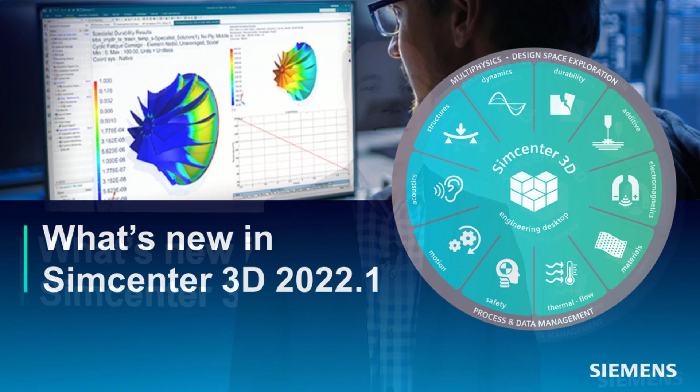It's been a year since I had the pleasure of talking to you all, and while 2021 was still a challenging year for many of us due to the ongoing pandemic, it was still also a productive year in terms of new development in simulation.

But before I get into some of these new developments, let's talk about the challenges that many of you face in simulation today. One of the major challenges with simulation today, in a general sense, is that it's too slow. Typically, CAE analysts spend up to 80% of their time just on modeling processes alone. And even more frustrating is that this entire process is often repeated for every single design iteration, since it can be difficult to reuse the previous analysis model.

The second challenge is that simulation in many organizations only takes place at the final validation stages of the development cycle. But to make simulation more effective, it must be used at all stages of development and by more than just simulation experts.

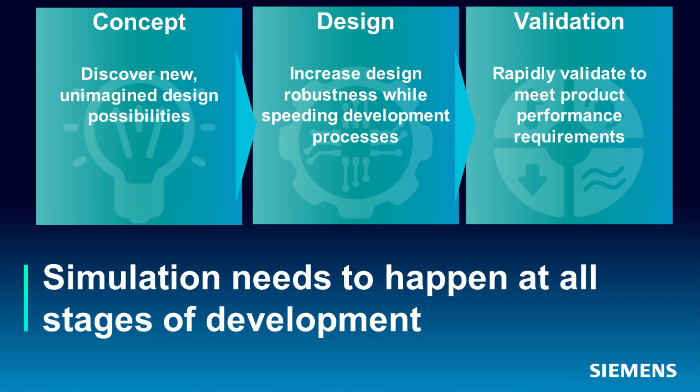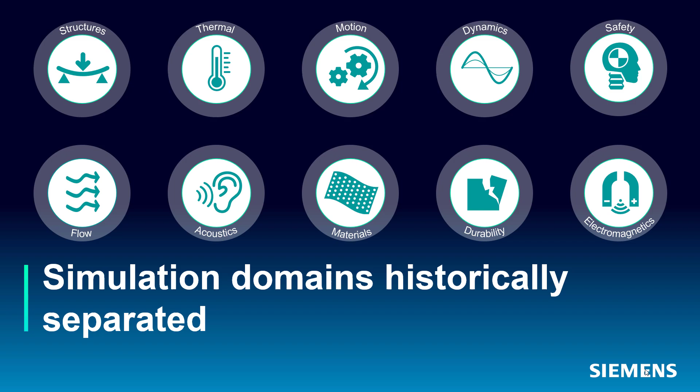Another obstacle today is that simulation engineers work in silos based off their functional domains, and each domain has historically required a specific set of software tools where user interfaces, processes, data files, and even vocabulary are all completely different. But physics don't happen in a vacuum, and in the real world, multiple physics are all happening simultaneously and have an impact on one another.

So how can you predict product performance if you cannot accurately predict multi-physics interactions? More collaboration and integration among analysts and software tools is required to better predict how your products will perform.

Simcenter 3D helps you conquer these challenges. As the most comprehensive, fully integrated CAE solution, you can work across simulation domains from a common engineering desktop. Simcenter 3D helps you go from CAD to CAE quickly while also keeping your simulation models in sync with the latest design.

And as I mentioned earlier, the Simcenter 3D development team has had an extremely productive year, and I would like to share with you what's new in this latest release, Simcenter 3D 2022.1.

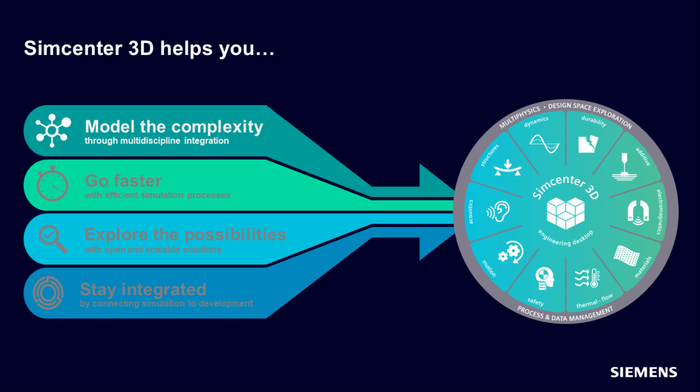New enhancements in Simcenter 3D help you improve simulation in 4 key ways. The first is model the complexity. Your products are complex, and you need to accurately simulate and predict performance by correctly capturing the right geometry, physics, and operating environment.

The next is go faster. Increasing complexity can slow down your organization's ability to make the right decisions and meet project timelines. Therefore, engineers need to find a way to go faster despite the complexity that they work with.

Explore the possibilities. Innovation requires exploration, which means you need to quickly explore performance for more design variants. This can be done by shifting simulation to the left into the design community, as well as automating and exploring more options for in-depth analyses.

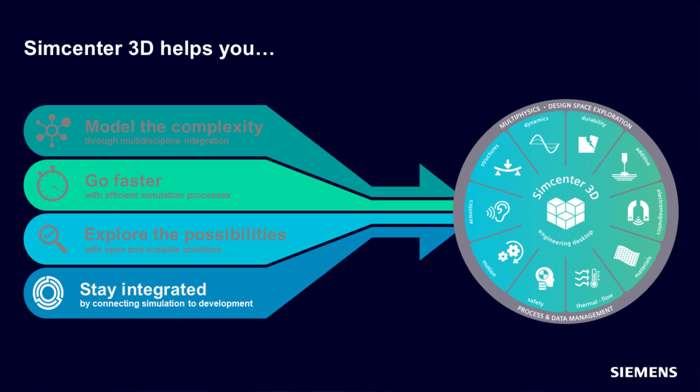And finally, stay integrated. With increasing complexity, there are more opportunities for misalignment between the different teams in development. Simcenter 3D connects you with the broader Simcenter portfolio to keep you more integrated with the broader development process.

So let's start with modeling the complexity. In this release, we have invested heavily in adding applications used extensively in the development of turbomachinery.

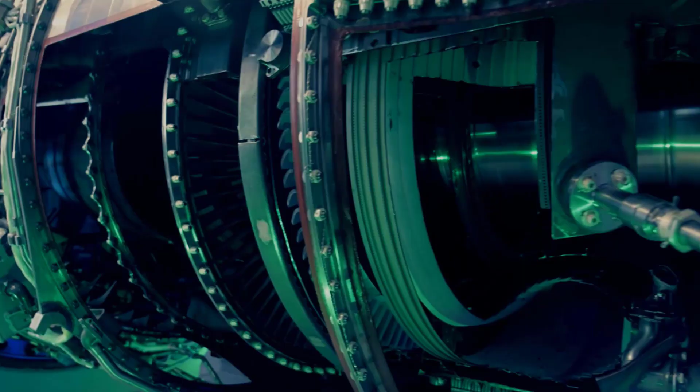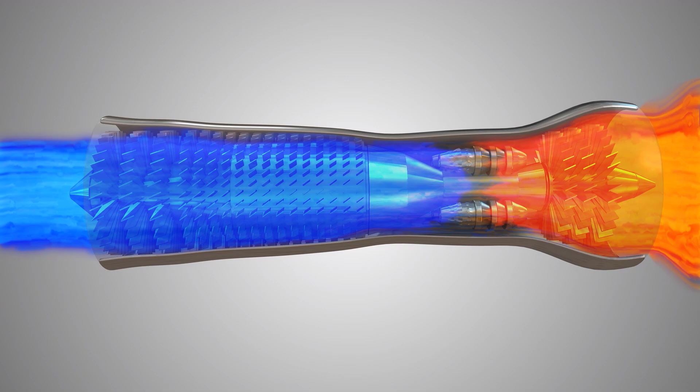Now, turbomachinery engineering is complex for a lot of obvious reasons. You have very complicated geometry throughout the cross-section, combined with many spinning bladed discs of different sizes, with fast fluid flow passing through the system, which undergoes extreme thermal changes. Fluid flow and heat also impact the structural integrity and dimensions of internal components, which adds yet another layer of complexity. And I haven't even yet mentioned the vibrations and dynamics that the system produces when operating at various speeds.

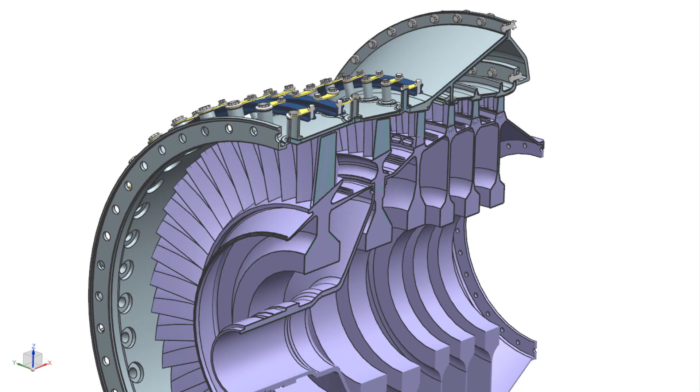So this is why SimCenter 3D has become a leading tool for turbomachinery analysts, since all of these analyses and more can be achieved through a single integrated platform.

So let's start with rotor dynamics. One of the main objectives of rotor dynamics is to properly identify the critical speeds of the system, which can then lead to very large vibrations and even system failure.

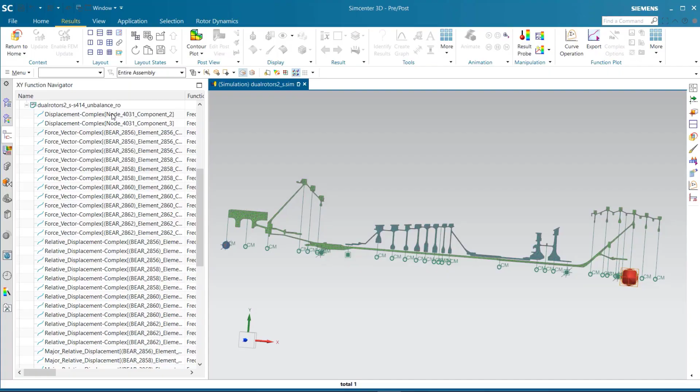SimCenter 3D offers a comprehensive rotordynamics solution with efficient modeling capabilities that help you quickly go from CAD geometry to simulation model. Using SimCenter 3D, you can predict critical operational speeds and survivability of rotating systems, while accounting for gyroscopic effects and centrifugal loads in a wide range of situations.

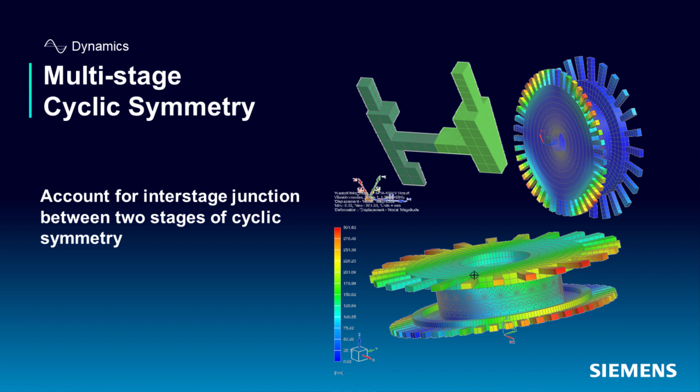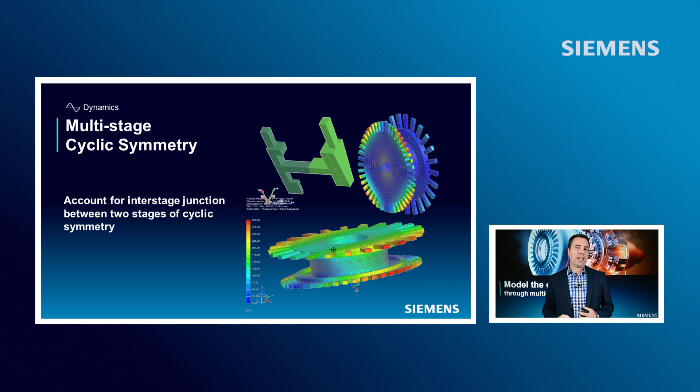A major highlight in this release for rotordynamics is the ability to account for the interstage junction between two stages of cyclic symmetry. When a rotating machine is made of different stages of cyclic symmetry, having potentially a different number of sectors in each stage, the interstage junction must be taken into account, like in this model with two stages of cyclic symmetry. This new capability couples different cyclic fields at the interstage junction by adding different fundamental, higher-order harmonics.

When looking at the results, we can post-process results for each harmonic on individual sectors, but we can also recombine the results on the full 3D model, taking into account the different harmonics together.

Understanding the thermomechanical performance of turbomachinery is another challenging feat. Prototyping is far too expensive, yet traditional disconnected CAE tools are limited in the physics that they can simulate. The real world integrates complex physical phenomena in one environment. Your gas turbine simulations should too.

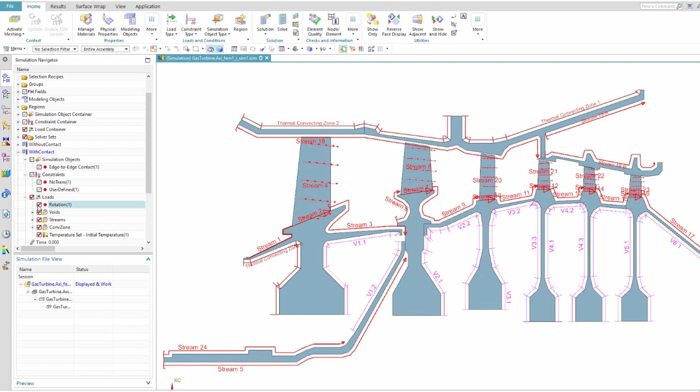SimCenter 3D integrates multiple physics disciplines within a single environment, which means you can create a whole engine model to see the complete engineering picture. Not only can you model and simulate multiple disciplines within a single environment, SimCenter 3D helps you to efficiently simulate the interrelated effects of heat transfer, fluid flow, and structural mechanics by streamlining multi-physics analyses.

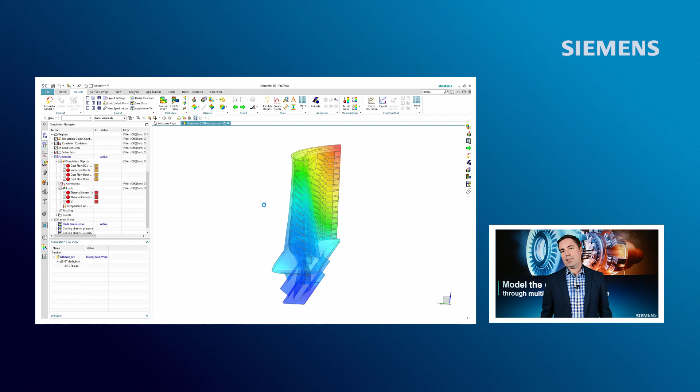Today, engineers modeling the entire engine use what's called the whole engine model, which incorporates 2D axisymmetric and 3D components and thermal convective boundary conditions and ducts to represent the fluid. The key to getting the correct results is having the right heat transfer coefficients.

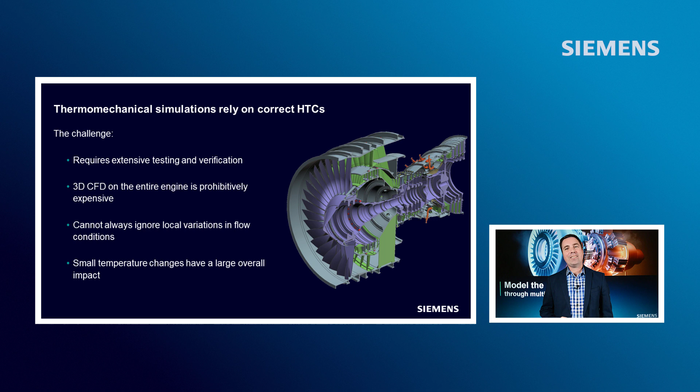This has been a challenge because using 3D CFD everywhere is prohibitively expensive, and capturing the correct heat transfer coefficients requires deep knowledge and experience backed by a multitude of tests and verification. In this latest release of SimCenter 3D, we have introduced a solution to add 3D CFD to portions of the model and support convection to axisymmetric meshes and connections to the 1D fluid network.

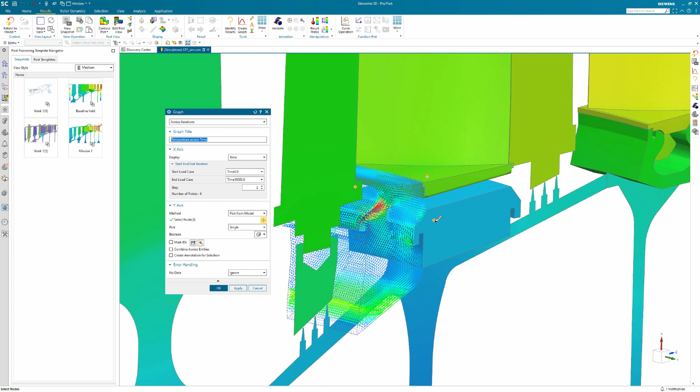This means you can connect 3D fluid simulation domains in a cyclic symmetric model defined with axisymmetric elements that are commonly used to model a turbomachine cross-section.

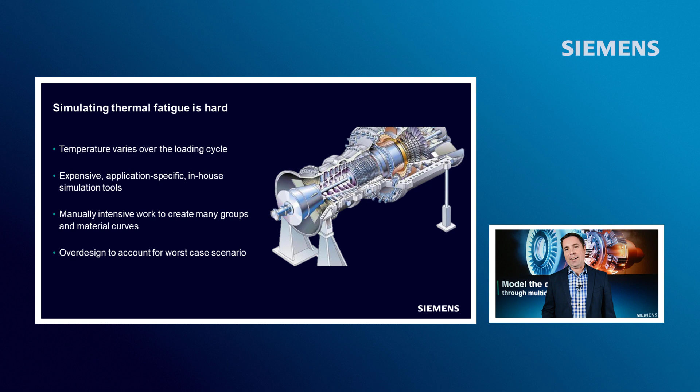Another common challenge for turbomachines is simulating thermal fatigue because temperature varies over the loading cycle. To calculate this today, many manufacturers use application-specific in-house simulation tools, which are difficult and expensive to maintain. Solving this problem also requires engineers to manually create many groups and material curves, which is tedious and takes up valuable time. As a result, engineers instead opt to over-design to account for worst-case scenarios, which means heavier components and more material.

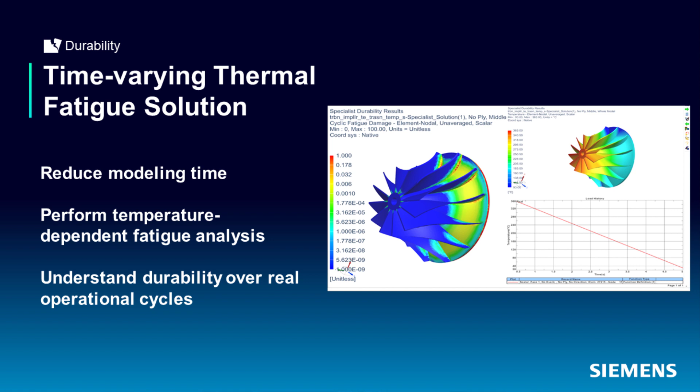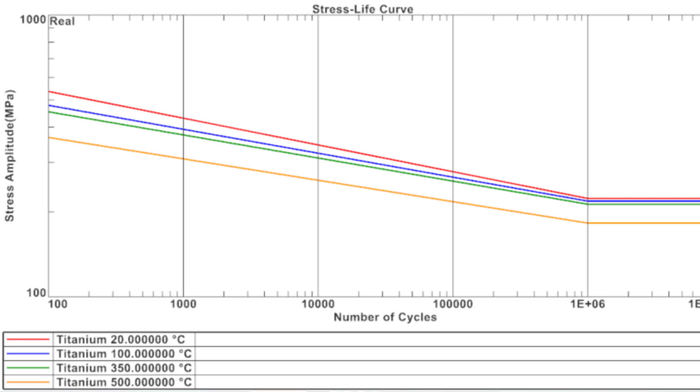But new in SimCenter 3D is a time-varying thermal fatigue solution. This solution reduces modeling time by allowing you to read temperatures, stresses, and strains from FE results, and ultimately perform temperature-dependent fatigue analysis so that you can understand durability over real operational cycles.

In summary, these new solutions in rotordynamics, thermal multiphysics, and durability all help engineers more efficiently model and understand the complex nature and performance of turbomachinery. Engineers can use these tools to further improve turbomachinery efficiency for a more sustainable future.

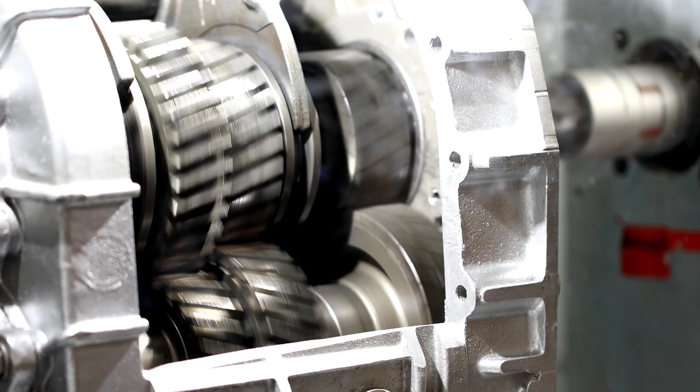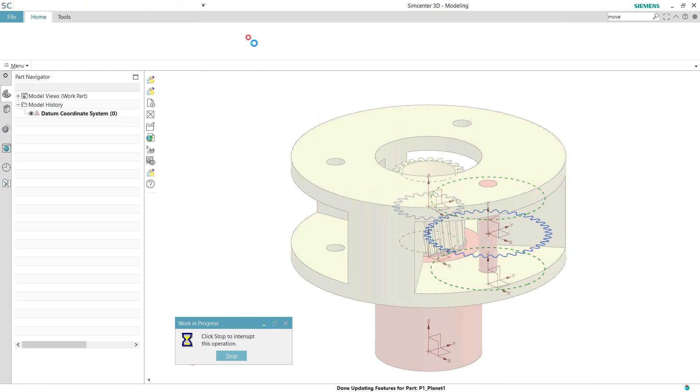Now let's transition away from turbomachinery, and instead I want to talk about gear transmissions used in automotive, machinery, and other industries. Creating the complicated geometry and multi-body-based simulation models for gear systems is extremely time-consuming and difficult. But SimCenter 3D Motion Drivetrain, introduced a few releases ago, makes it much easier for you to quickly build and simulate complex transmission architectures. In this latest release, we have added a dedicated capability to simulate spiral bevel gears, often found in automotive differentials. This means you can perform accurate system-level NVH analysis on these mechanisms.

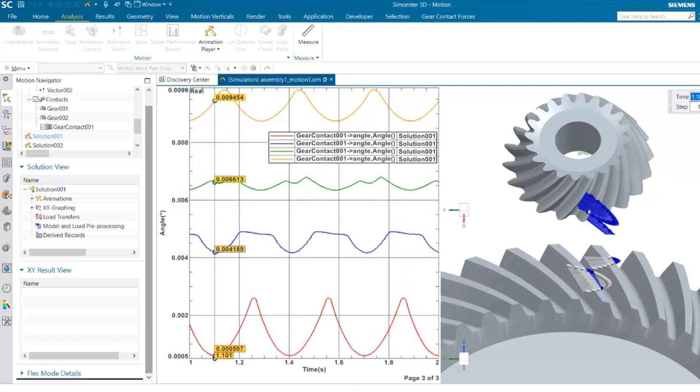So this can help you better understand the noise that these systems generate so that you can make your products quieter.

Now let's move on to structural analysis, and more specifically, nonlinear analysis. Why is nonlinear analysis important? Nonlinear is better at capturing the true behavior of a component. While linear analysis is good and very efficient for some applications, it can't simulate what happens once you get into the plastic zones of your materials. And with more advanced materials like composites, linear won't be able to predict what's truly happening with your component.

Many of you are already familiar with SimCenter Nastran, which has been used to solve linear structural analysis problems across most industries for decades. But did you also know that SimCenter Nastran can be used to solve nonlinear analysis problems? Well, it can, and it does it well. Siemens has brought together the Nastran technology that has been standard for more than 50 years and combined it with the advanced nonlinear capabilities in Samcef to create the SimCenter Nastran multi-step nonlinear solution.

SimCenter Nastran offers a complete set of nonlinear capabilities that will support most needed types of simulation. In this latest release, we have invested to continue to improve the performance and overall capabilities of the nonlinear solution. One unique capability related to nonlinear analysis in this release is a new application dedicated to drop test simulation.

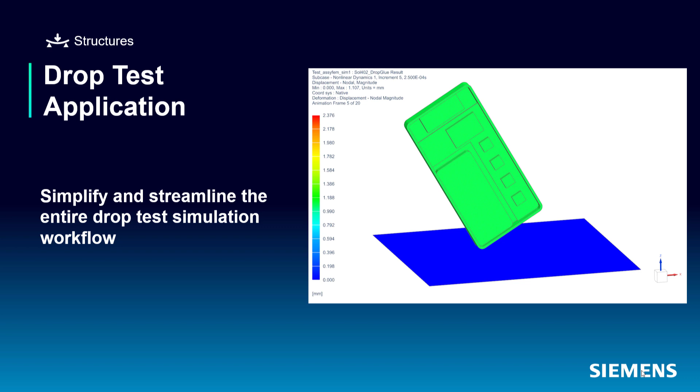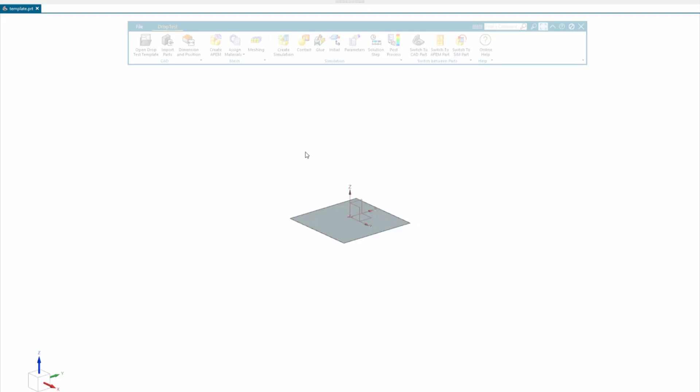We all use lots of expensive devices that we can easily drop, and I'm sure there's a few of you out there that have had bad things happen when you drop your phone out in the parking lot. But the drop test simulation process is often laborious, and the engineers at consumer electronic device companies usually aren't experts in structural simulation. The new Simcenter 3D drop test application is a dedicated app that you can add onto Simcenter 3D, and it will show up as a toolbar right from within the Simcenter 3D environment.

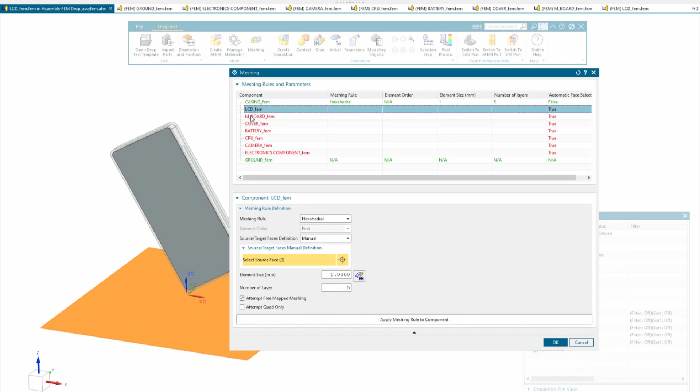This application simplifies and streamlines the entire drop test simulation workflow from model setup to solve to results post-processing. Results templates and reports help electronics engineers more easily understand the results of their drop test simulations so that they can quickly make the design modifications they need so that their devices can better withstand our clumsiness.

Now let's move to the fascinating world of materials. Today we see new materials being introduced to the market at unprecedented speed. Nearly 70% of product innovation relates to material innovations.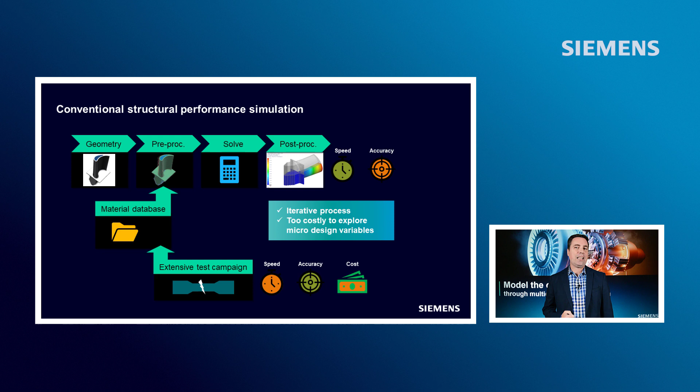However, materials innovation is inefficient. Developing and certifying new materials is a long and expensive endeavor, costing some aerospace companies 10 years and $50 million. This is partially due to the extensive physical testing requirements, since engineers often don't understand what the failure mechanisms are in advanced new materials. And traditional simulation models don't account for advanced materials, which can vary at the microscale level. Material failure really starts at the microscale level and propagates out to larger scales.

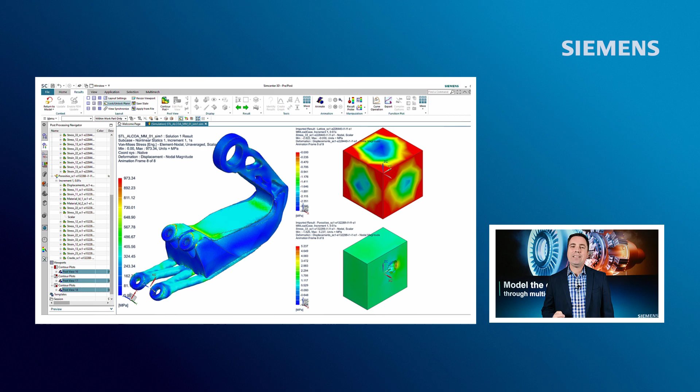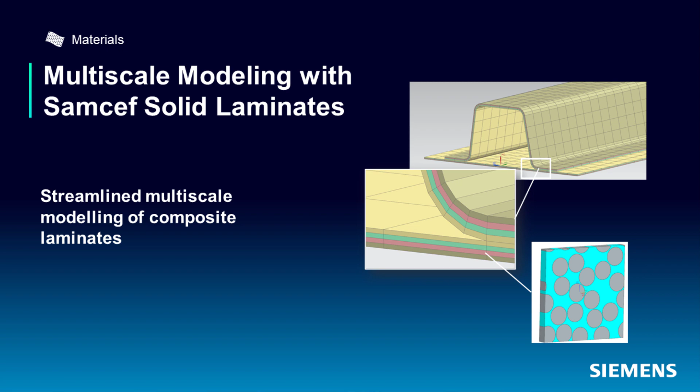So to more accurately simulate and predict the behavior of advanced materials, SimCenter 3D Materials Engineering uses adaptive multi-scale modeling. In this latest release for SimCenter 3D Materials Engineering, we have tightened the integration so that multi-scale materials can be used in our SimCenter 3D Laminate Composites modeler. This streamlines the multi-scale modeling process for laminate composites so you can more accurately predict performance for complex laminate structures.

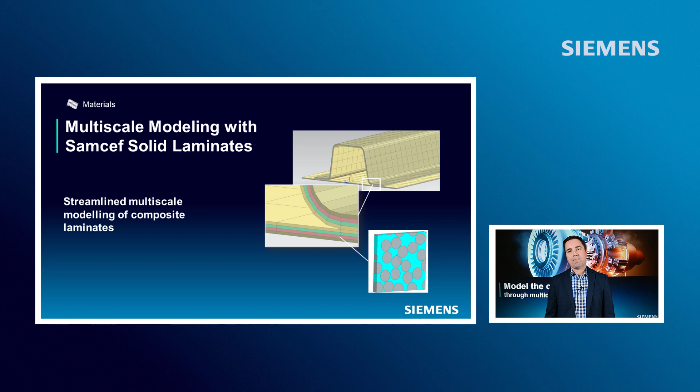Another enhancement is the ability to homogenize permeability of porous structures. It's not feasible to perform CFD analysis on a material with microscopic pores. So instead, given a unit cell or microstructure model, you can homogenize the permeability accounting for the microstructure. You can then use that permeability data in larger scale models to further predict flow at the global scale.

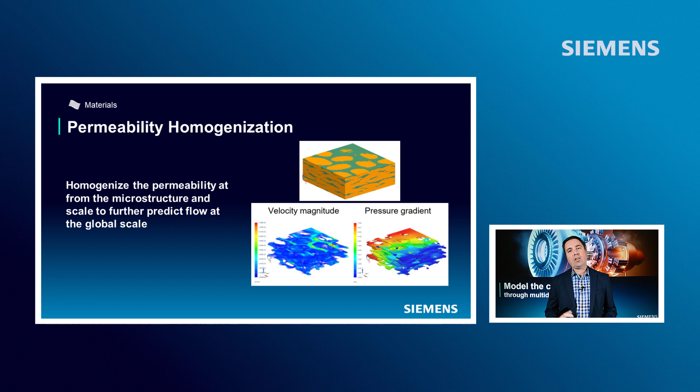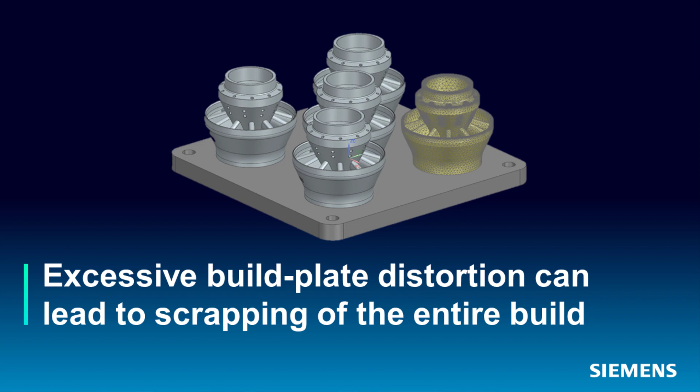To enable multi-physics workflows, additive manufacturing is another new area where engineers are learning to grapple with complexity. New in SimCenter 3D is the ability to look at how the build plate can get distorted during the build process. 3D printing results in large residual stresses and strains in printed parts, and these stresses can result in excessive deformation in the build plate after the bolts are removed.

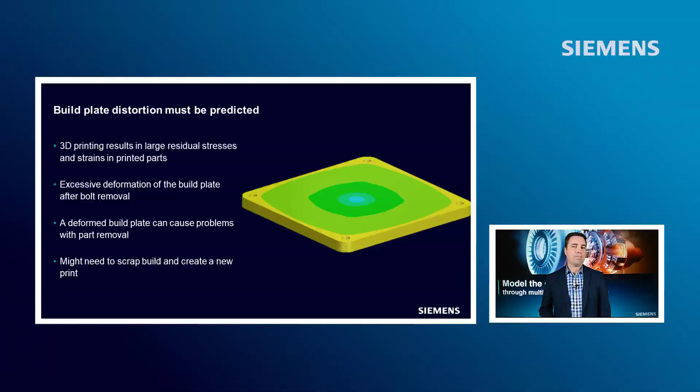A deformed build plate can cause problems with removing parts from the plate, and sometimes you might even need to scrap the build and create a new one. In this latest release, you can now define a flexible build plate which includes plate geometry, material, and thickness. During simulation of the build process, SimCenter 3D calculates the stress buildup in the plate bolts due to thermal expansion of the printer.

Next, you can simulate bolt removal to see how the build plate will deform due to the residual stresses in the specimens. If the deformations are too large, you then need to use a thicker build plate or put fewer specimens on the build plate.

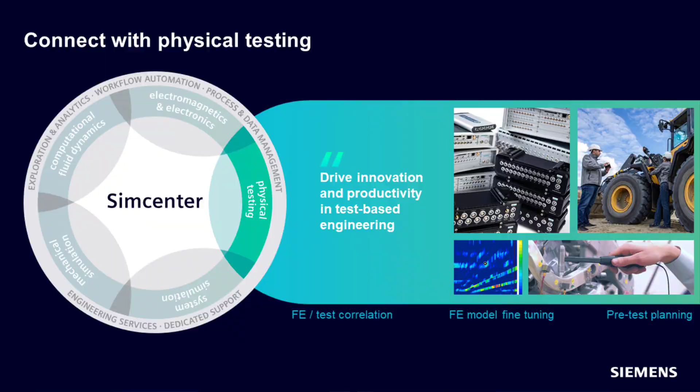The final topic in the subject of modeling the complexity is how do you know your simulations are accurately predicting reality? Correlation of analysis results with physical testing is a key task that helps ensure confidence in simulation. Simcenter 3D, along with our close interactions and connections with Simcenter Test, helps streamline the correlation process, and that's been available for many years for dynamic analysis.

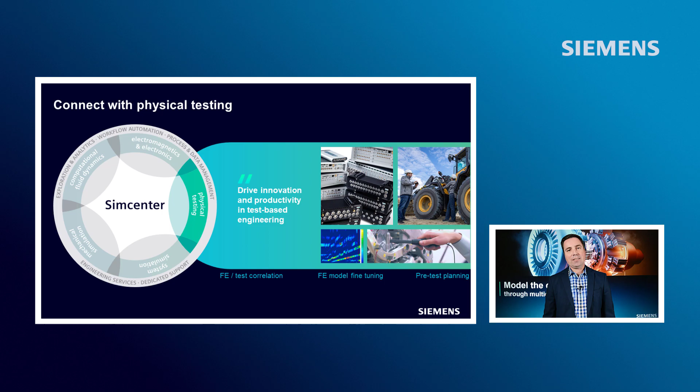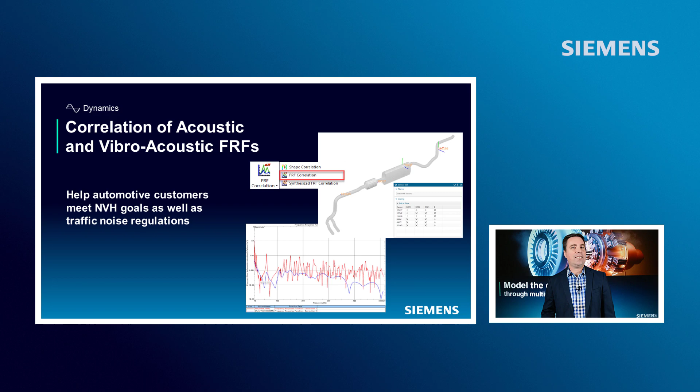What's new in this release is the ability to now use Simcenter 3D's correlation capabilities for acoustics and vibroacoustics. This means acoustics engineers and NVH engineers can fine-tune their simulation models to real test data so that they can be confident that future simulations will more accurately represent what's happening in the real world. Ultimately, this can help NVH engineers meet targets for noise based on regulations, as well as requirements that your end customers will expect.

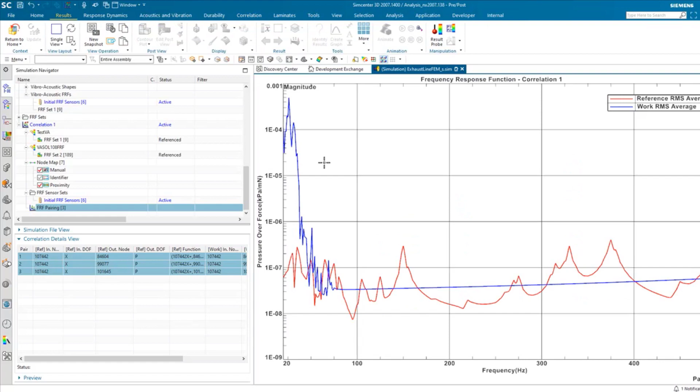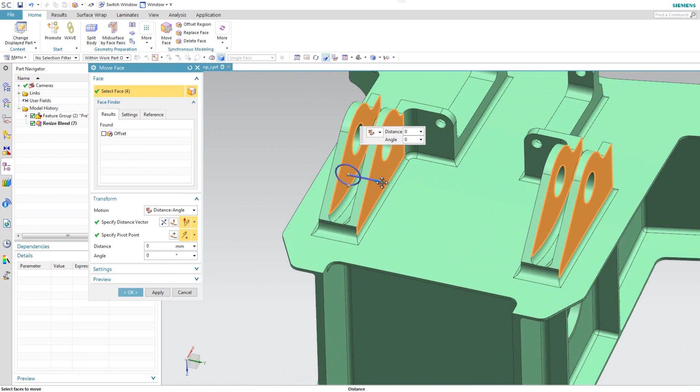Now let's move to our second pillar, to go faster. As I mentioned at the beginning of the presentation, the traditional simulation process is often too slow, and engineers get too bogged down in detailed modeling tasks. Simcenter 3D aims to eliminate the simulation bottleneck by providing efficient simulation processes to speed modeling so you can spend more time engineering.

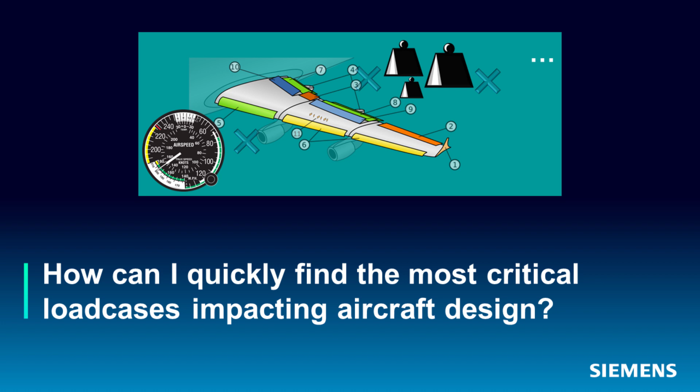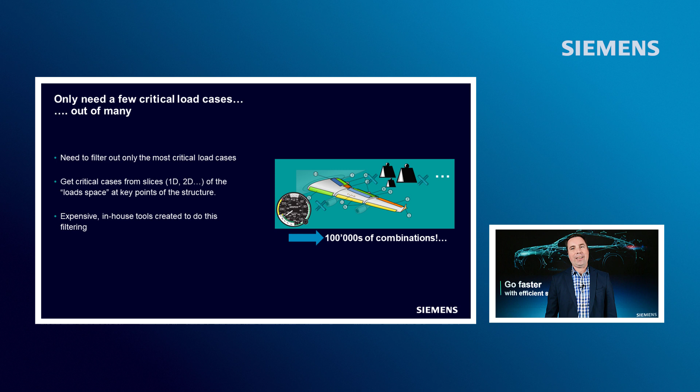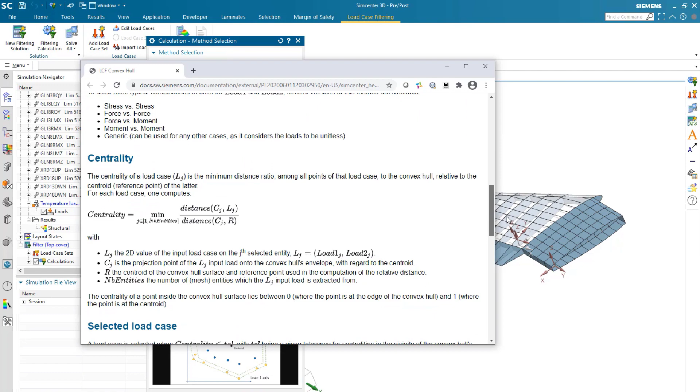What's new for Simcenter 3D, specifically for aerostructures, is the ability to easily manage large numbers of load cases. Airframers need to manage thousands of load cases, and searching and filtering to find the critical load cases that really have the most influence over certain aspects of a design is tedious and time-consuming. Often, airframe companies might use in-house tools for this filtering, but maintenance and upkeep for these tools is also costly. Simcenter 3D introduces load case filtering, which leverages CAD and FEM model interaction to reduce definition time. This new process allows you to quickly define filtering methods, extract loads and related geometry, which you can then further post-process from within Simcenter 3D to ultimately determine the final critical list of load cases.

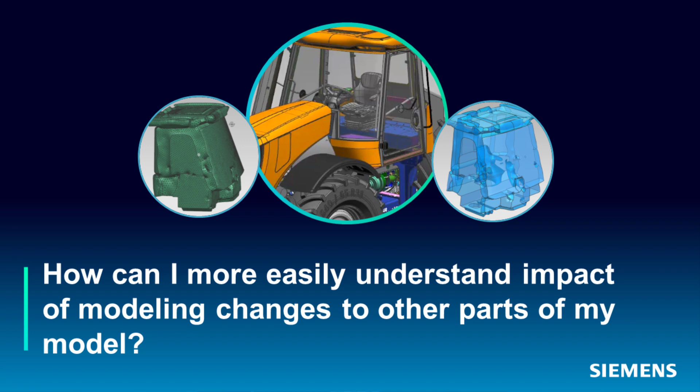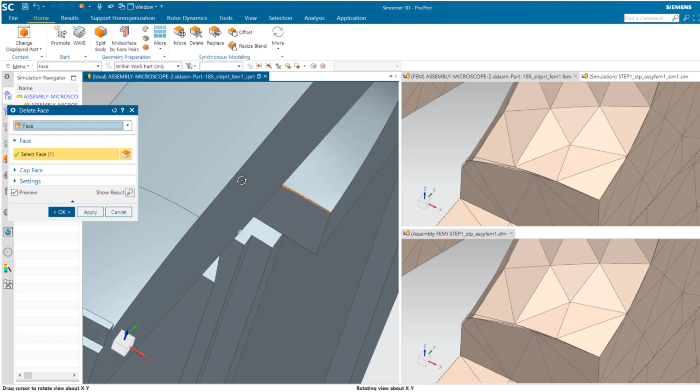Outside of the airframe vertical, we've also added new capabilities that help all simulation engineers during the modeling phase, which can help you understand how changes you make to certain aspects of your model will ripple across and impact other parts of your model. For example, you can have your idealized part displayed in one tab, its FEM component in another tab, and the full FEM assembly in yet another tab. All of these are displayed simultaneously and synchronized. If you make a change to the geometry in the idealized part, that will then have a downstream impact on the FEM component in assembly, which you can now immediately see ripple all the way through. This helps you better understand the changes you make in the context of the entire model, so you're not having to manually switch between different views or parts.

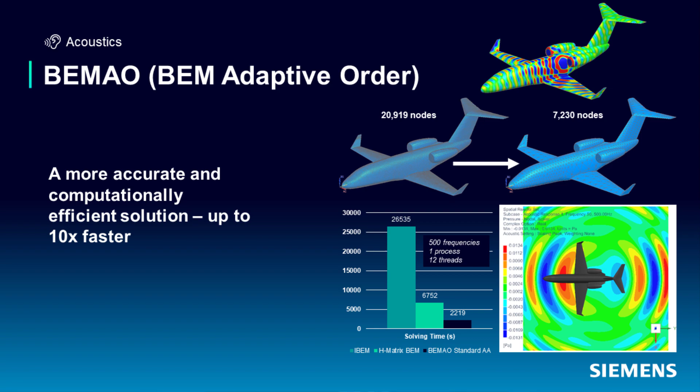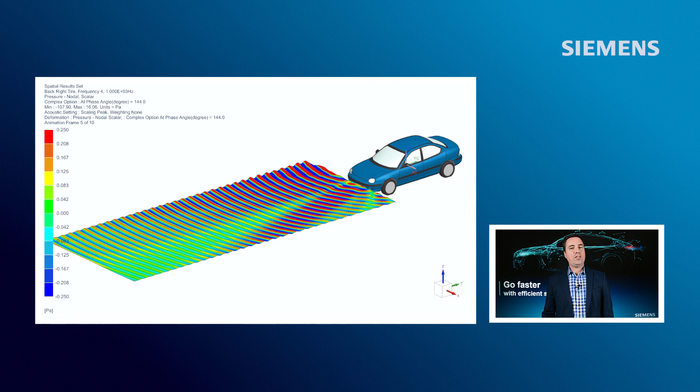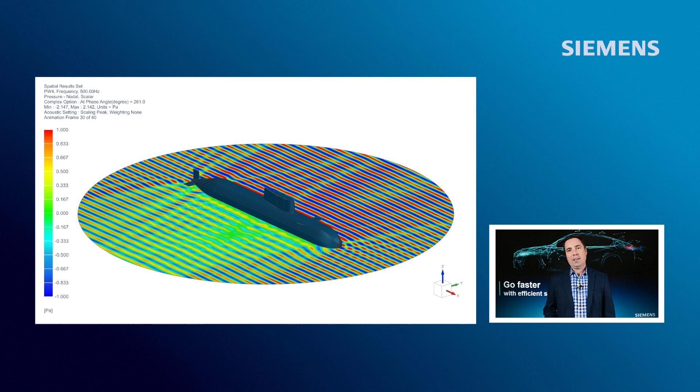Solving speed also plays a role in the simulation bottleneck for some types of simulation, and solution speed is critical to getting results and decisions back to the design team quickly. So another way in which this release of Simcenter 3D helps you go faster, specifically for acoustics analysis, is through a new high-performance boundary element method with adaptive order, or BEM-AO as we like to call it. This solution helps in a couple of ways. First, in terms of modeling, BEM-AO uses a very coarse mesh, which means you save time in the modeling process for your model. Next, the solution speed for BEM-AO is significantly faster compared to standard BEM solution times, up to 10 times faster in fact.

Now let's see how you can explore more possibilities. In my introduction, I outlined how simulation needs to happen at all stages of development, including the concept and design stages. To move simulation to the concept stage, we need to look at democratizing simulation so that it's not just a tool used by expert analysts.

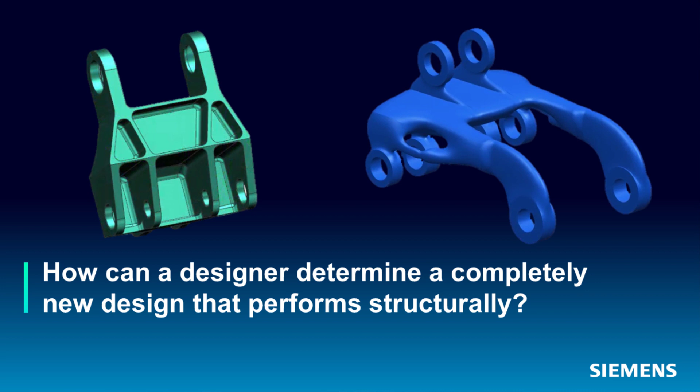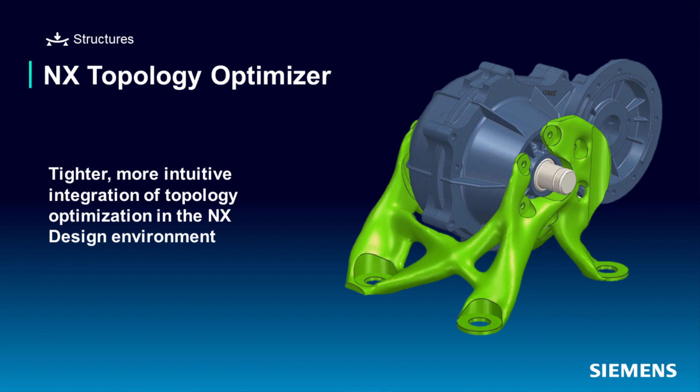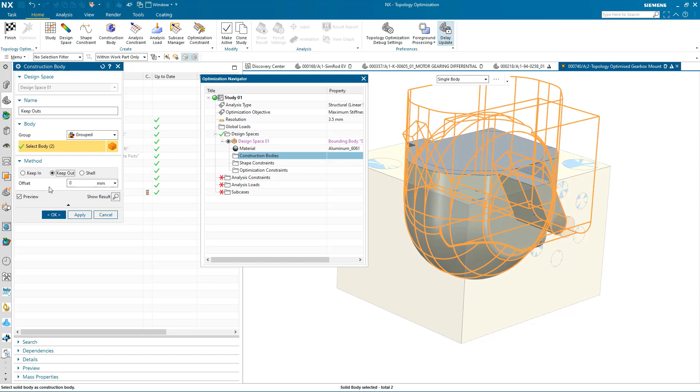To help designers come up with new design concepts, NX topology optimization, which uses structural simulation of a package space to determine what the optimal geometry should be, has been available for a few years now. In this release, we have enhanced our topology optimization capabilities for designers to have an even tighter integration with the NX environment. You'll first notice topology optimization now has its own ribbon bar and navigator in NX. Designers use this to construct the optimization feature, run the optimization, and validate results. Topology optimization is now also a replayable feature in the part navigator tree, and so it will work just as a designer expects any other feature in the tree would behave. This means it keeps upstream associativity, so anything a designer changes that could impact the design package space gets updated. Downstream changes from the topology optimization feature also update based on changes to the results.

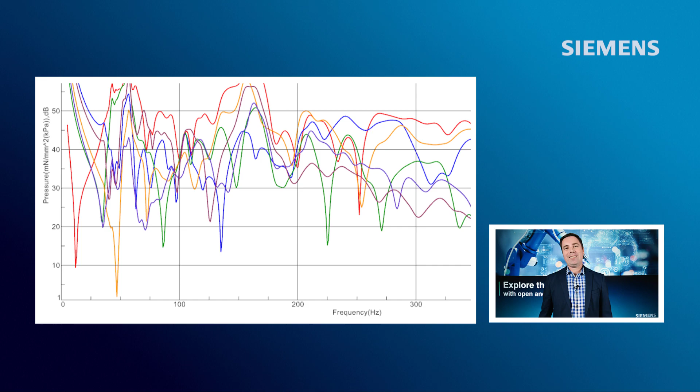Another way to help democratize simulation and explore the possibilities that simulation can offer is by making simulation results more consumable for non-simulation experts. For those of you who are not acoustics engineers, do you even understand what this graph means? Acoustics is about sound. What kind of sound does this even represent? For this reason, last year we introduced the ability to auralize the simulation results so that you can actually hear the noise that the design will make in operation.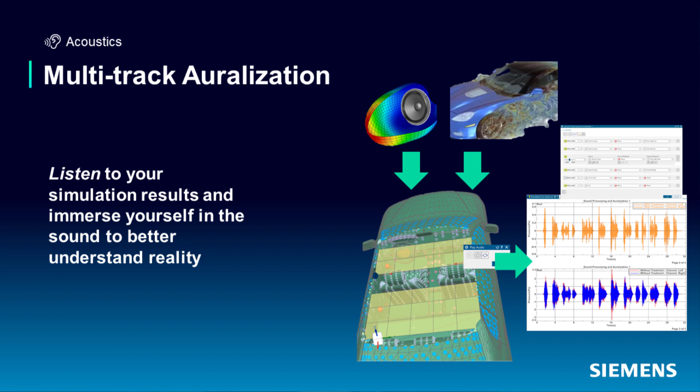In this latest release, we have extended the auralization capabilities to support multiple tracks. Suppose you just simulated the sound of a loudspeaker in a free radiation environment. Now, how will that loudspeaker sound when you actually put it in a car and combine it with the background noise from the engine, HVAC, wind, and road?

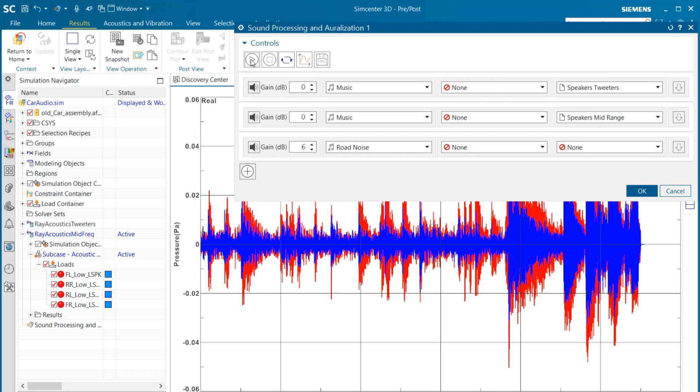Can I still understand incoming calls or alert signals when the AC is on, or when I'm driving at high speeds with a lot of wind noise? With this new multi-track capability, you can now mix the contributing results and listen to the combined results to answer these questions.

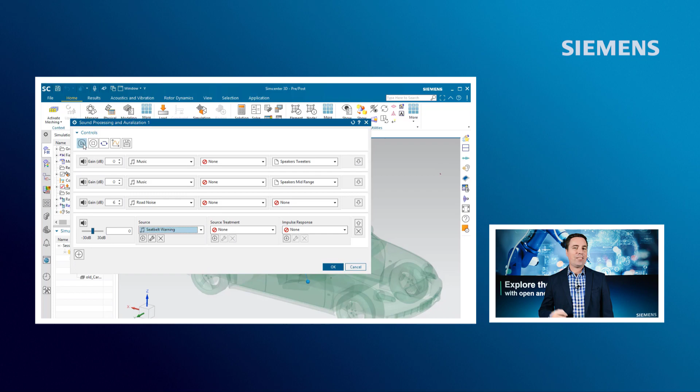Listening to results helps designers and other stakeholders more easily understand the impact that design choices will have on the end customer experience, without having to be an acoustics engineer.

Finally, simulation doesn't happen in a vacuum, or at least it shouldn't. Simulation is just part of the development process, and it's critical that simulation stays integrated with that workflow.

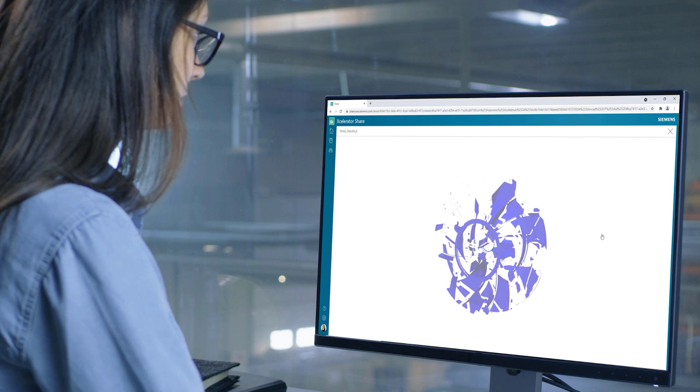Xcelerator Share is now available in SimCenter 3D for Xcelerator as a Service subscribers. It's a new way to integrate the development workflow across the Siemens Xcelerator portfolio for small companies and workgroups. This collaborative cloud environment works across NX, SimCenter 3D, STAR-CCM+, and many other tools, so users can seamlessly share files and communicate results to each other.

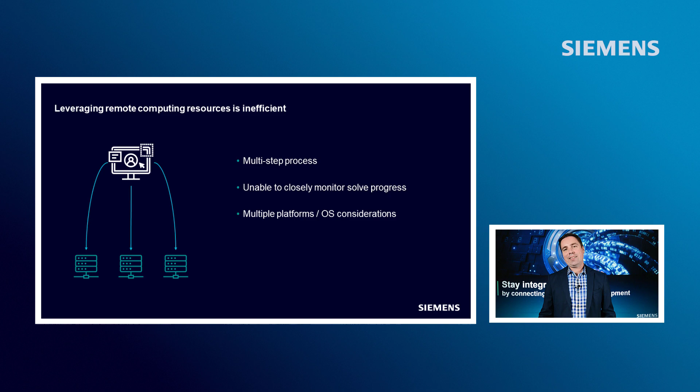Analysts have always been looking for ways to leverage more powerful workstations or clusters to speed up their simulation or to run much larger simulations to increase accuracy. But connecting to a remote workstation or HPC cluster to submit and monitor your simulation jobs can be a real challenge: exporting files, copying them to the remote machine, maybe modifying input files to make sure they run on the new machine, or starting to solve with command lines. These all take time and can induce errors.

So it's critical for SimCenter 3D to stay integrated with remote systems to make that process as simple as possible. The new SimCenter 3D remote simulation capability solves this problem.

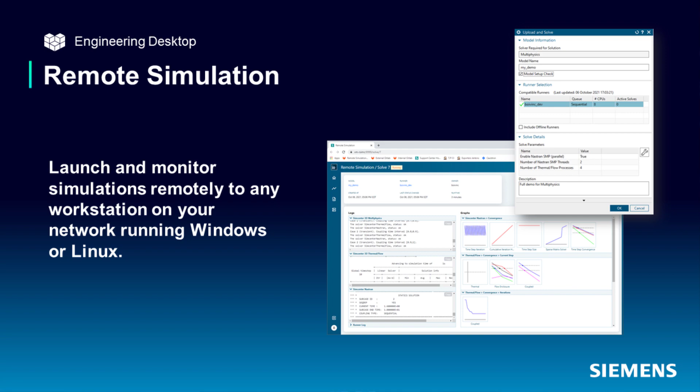You can now launch simulations remotely to any workstation running Windows or Linux on your network. You can easily connect to the server via the client in SimCenter 3D, where you can see in real time which runners are available to solve your simulation.

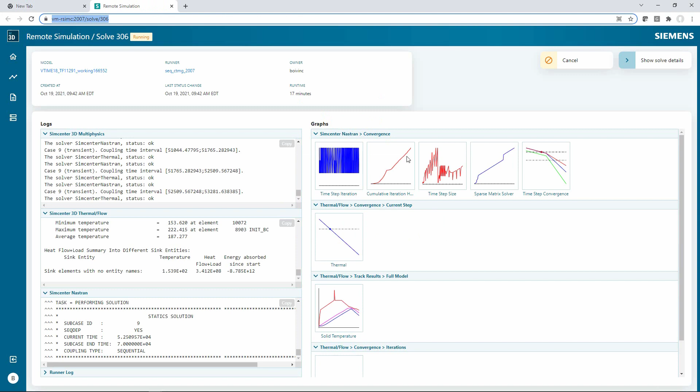You can then monitor the progress of an active solve right from your web browser to ensure that it's progressing properly. Once the simulation is over, you can bring results back to your SimCenter 3D workstation and then you're ready to post-process the results as usual.

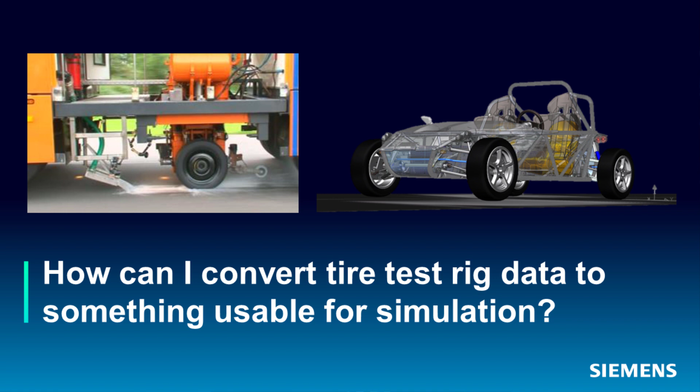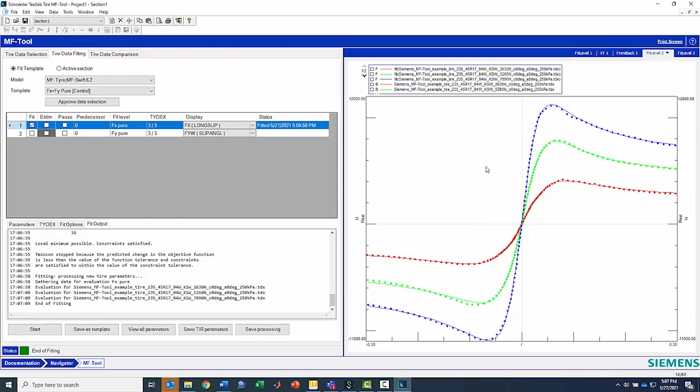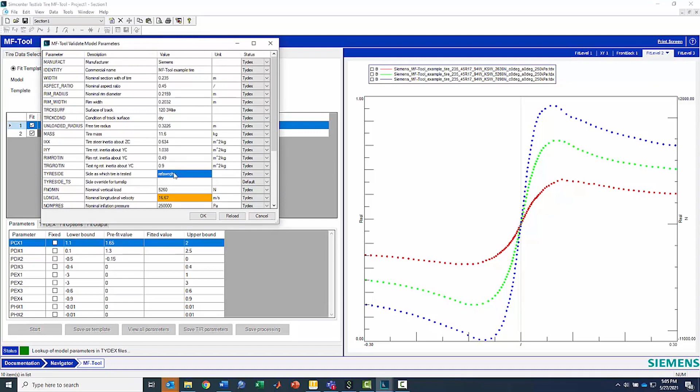As part of the Simcenter portfolio, we continue to further integrate Simcenter 3D with other solutions in Simcenter. A new example of this is MF-Tool, which transforms measurements obtained from a tire test rig into tire data that's used in Simcenter Tire. The tire data can then be used in vehicle multi-body dynamic simulations in Simcenter 3D Motion.

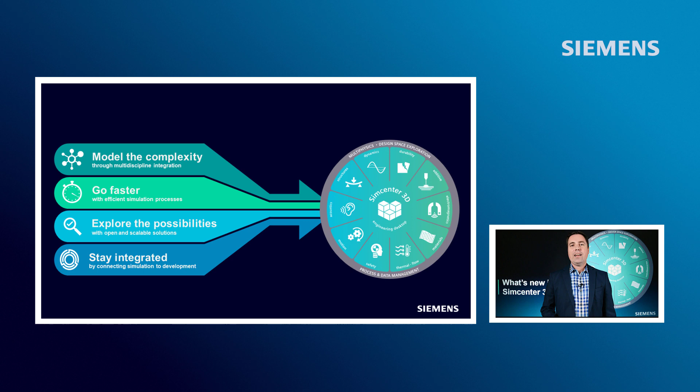So the new MF-Tool integrates and streamlines the entire process of obtaining real tire data, which can then be immediately used in your simulations. The Simcenter 3D team has had a productive year since I last spoke to you, and that's a whole lot of new content - these were only just the highlights. There's even more within Simcenter 3D 2022.1 that will help you model the complexity, go faster, explore the possibilities, and stay integrated.